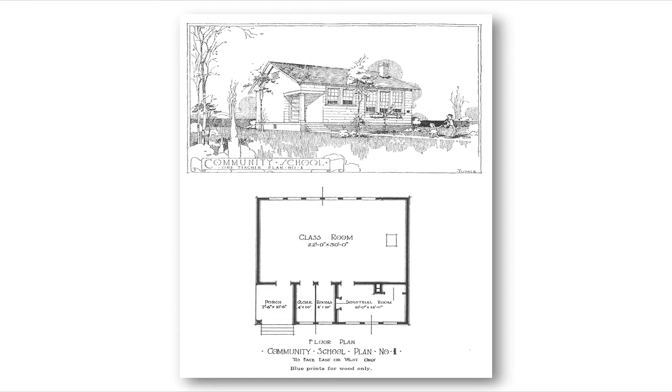All were initially frame construction. Here's a 2-room school with tall windows on one side of the classroom, providing a single stream of light falling from left to right to illuminate a blackboard and desks. After all, being rural schools, most did not have electricity.

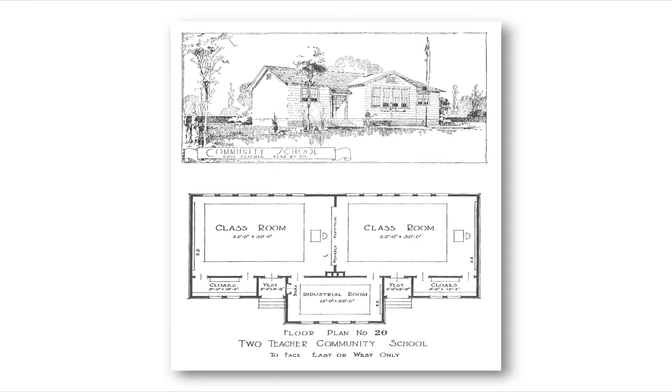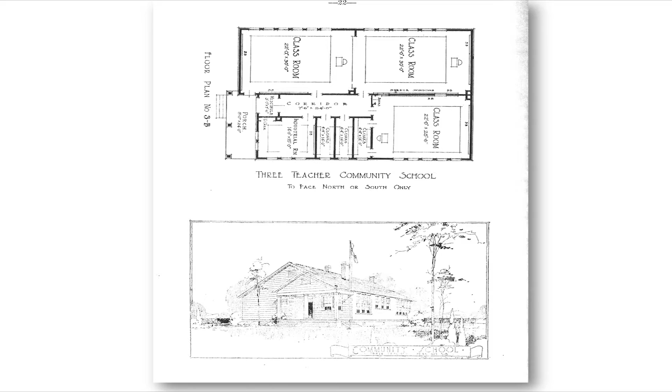A 3-room classroom with a community room. Breeze windows provided cross ventilation between rooms. They usually had dark wainscoting with buff painted walls and light cream ceilings with light tan and translucent window shades. Blackboards were on 3 walls with modern patent desks, not crude benches.

When white school officials wanted to shortchange on the furniture, the Rosenwald Fund refused to make final payment unless all standards were met. The fund was also concerned with clean drinking water, sanitary outhouses, and playgrounds, as well as with landscaping, recommending flowering plants, fences, and lawns.

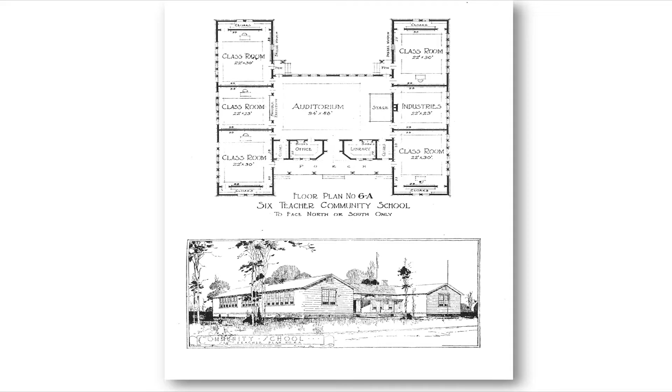There's a shop plan, a privy, and a teacher's house. The fund gave these plans away free to the state departments of education and local school boards. So if they look familiar, you may not be looking at a Rosenwald school.

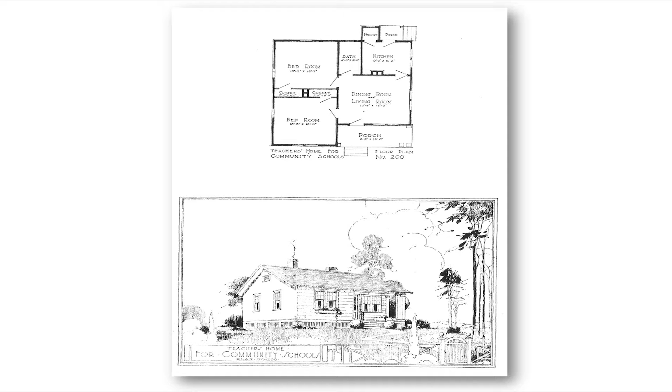It's an interesting situation where the black schools sometimes led the way. Since this is the 1920s in the South, when the Ku Klux Klan was reborn and growing, you've just got to wonder what they thought when a Jewish Yankee gave money to Southern blacks to build schools better than where some of their own children went.

So, where were the Rosenwald schools in Smith County? Here's a map from a master's thesis done in 1935-36, which shows all of the rural school districts. I'm going to be showing you sections of this map paired with photos from the Fisk database. Some of the photos are clear, some are not, but they will give you a good idea.

Also, most of the photos were taken as the school was finished, and then the map is from 10 years later. I think some may have had additions built by then.

Buttrick Wallace is in the Fisk database without a photo and is not on the school map, at least under that name. I think it may be the Starville Black School, but I'm not sure. Wallace Buttrick was the president of the General Education Board in the Rockefeller Center, other sources for funding for African American schools, so it may have been a temporary honorary name. For this school, blacks raised $600, whites matched that, and Rosenwald kicked in $800.

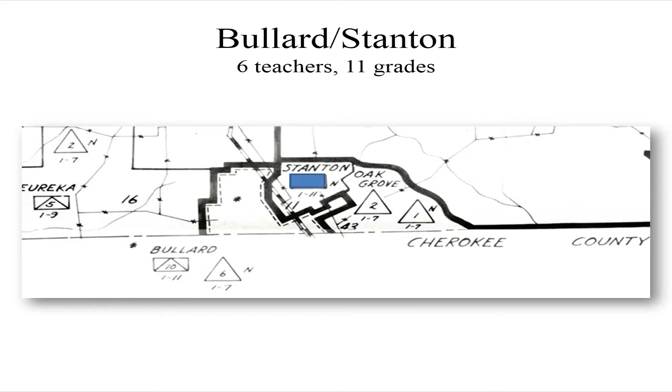Winona School already had 1 acre used for a school, and so the New Zion Colored Baptist Church gave another 1.5 acres to get enough land. The community also raised $500. Local whites gave $800, and Rosenwald gave $700 for a 2-teacher school. Only 1 school was built in 1924, 25, and none the year after that.